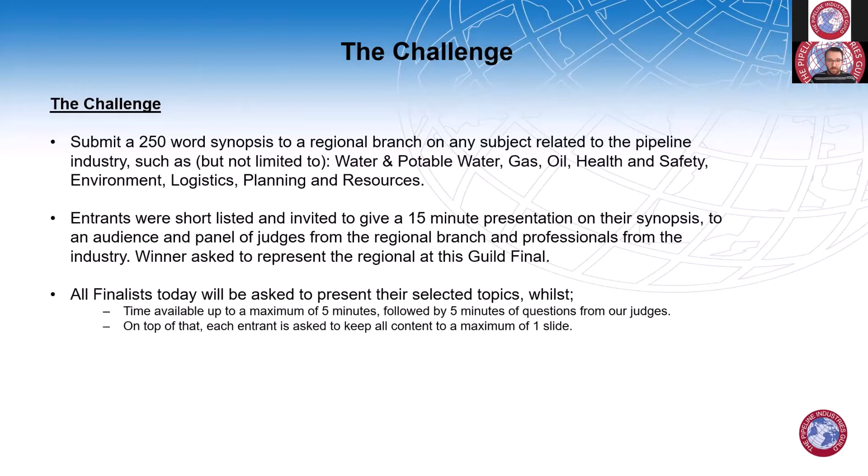Today is a lot more strict. All finalists today will be asked to present their selected topics whilst keeping their presentations to a 5-minute limit, as well as followed by 5 minutes of questions from our judges. On top of that, each entrant is asked to keep all their content to a maximum of 1 slide.

The winner today will receive the £500 prize, as well as being champion of 2021. But also I just want to highlight that every finalist today has also been invited to attend our annual Guild dinner on the 8th of March next year.

Lastly, one of the rules that was on entry is all our entrants today are 35 years of age or younger.

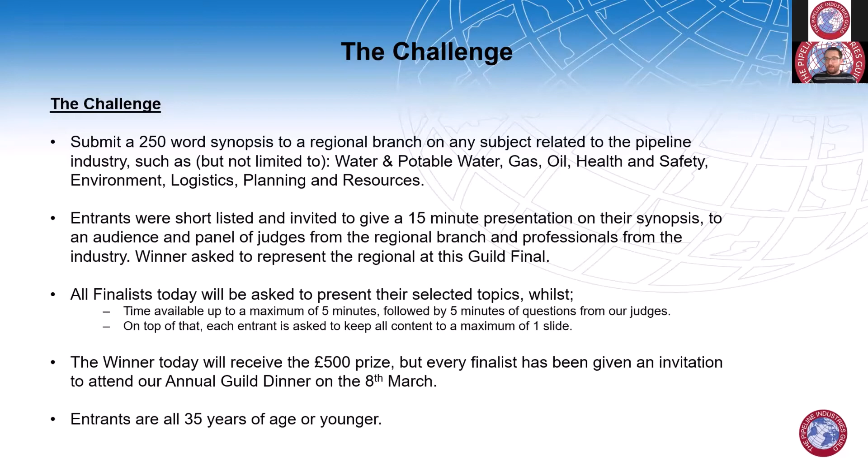So just to introduce our lovely judges today, Kate Lazenby will be one of our judges, our Executive Director of the Pipeline Industries Guild. I'm also pleased to announce John Murphy, our Guild President, will be one of our judges today, who is the CEO of the Murphy Group. And lastly, Dan Jefferson, our Guild Chair and our Engineering Manager at JN Bentley.

We are 3 judges presenting, judging for our 5 finalists.

What they will be looking at today is 2 main focuses of areas around the quality of the content and quality of delivery. They all have received the original synopses of the 5 finalists, but then what we'll also be looking at is the originality of the content, relevance of the material, quality of the presentations today, and their ability to answer the questions. Of course, as mentioned earlier, there will also be a 5-minute timing area as well.

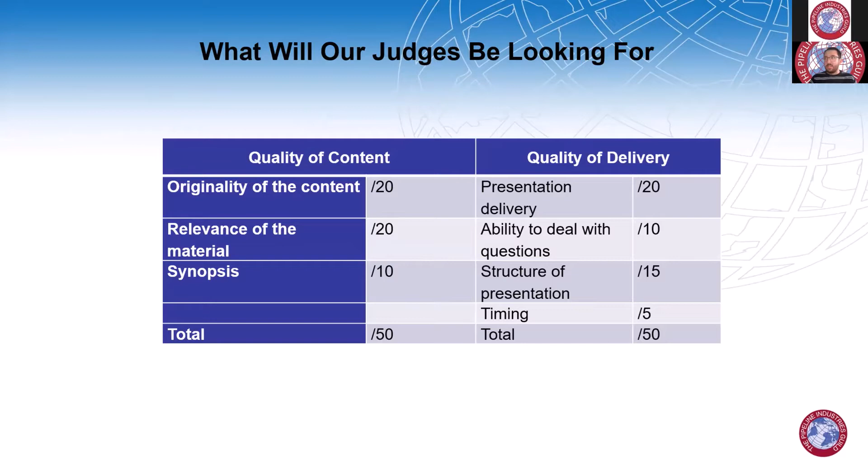So last but not least, introducing our 5 finalists. I'm really pleased to announce that we'll have Serena Variah from Severn Trent, our Midlands regional winner, who will be presenting on the hidden treasures of the water network.

Michael Sinclair from Cadent Gas, our Northern regional winner, who will be presenting on hydrogen-powered construction site trial.

Daniel Mee, also from Cadent Gas, who will be our Scottish regional winner, who will be presenting on reduced depth of cover gas distribution assets.

And lastly, Natalie Lamb, our South East regional winner from QCL, who will be presenting to us on experimental pipe facilities and investigation of chemical-free water.

So they are our 5 finalists, and I can now ask Serena to present on her 5-minute slide if possible. Hello, yeah, I'm just going to start my screen share.

Thank you, Serena. And can you all see that? Yes. Cool. So hello, I'm Serena Variah, and today I'm going to be sharing with you the secrets to the water industry's best hidden treasures.

I joined Severn Trent Water in 2018 as an apprentice project manager. Then in April 2020, I moved into a team which has the objective to inspect, clean, repair, and re-enter into service hundreds of DSRs across the Severn Trent region. What are DSRs, you may ask? They are distribution service reservoirs, and they have the essential job of providing all of your houses with clean drinking water every single day.

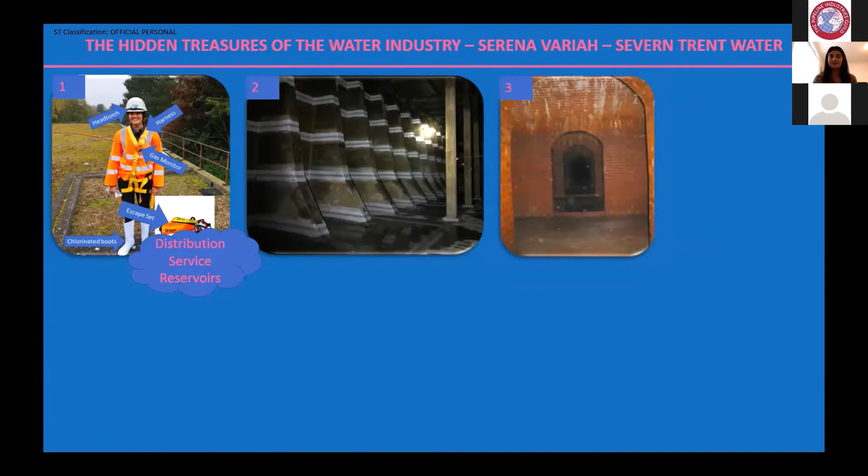Today I'm going to use this presentation to honour Bellevue DSR now that it's out of service, which is a shame, but it has such an interesting and exciting history which isn't widely known at all. So I thought I'd share that with you today, and maybe we can all learn something new.

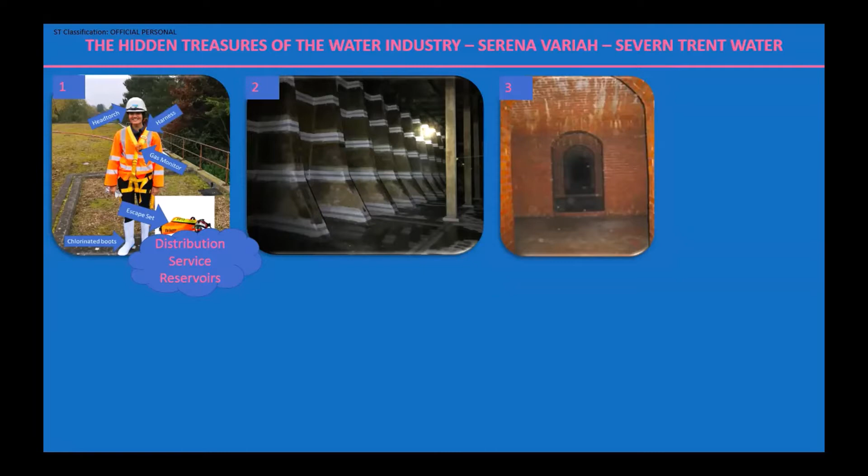I'm going to start by talking about an engineer who was instrumental in building and designing the DSR, Thomas Hawksley. He was born in Nottingham, and in 1830 started working for the Nottingham Water Works Company. He was instrumental in the design of DSRs, and also in making Nottingham the first city in the UK to have a constant pressurised water system, which led to a reduction in diseases that were rampant at the time, like cholera. He was a real innovator for his time.

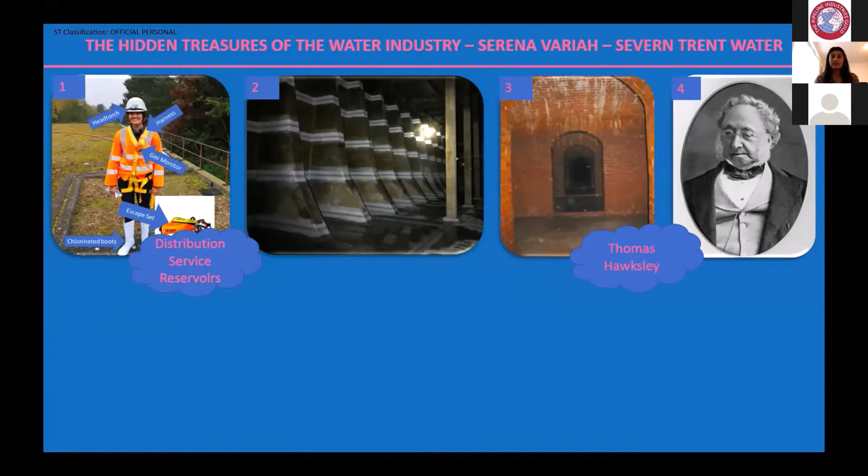Here are some pictures of the beautiful Bellevue DSR. The photos never do it justice, but you can get a little grasp of what it's like inside, with the lovely stone steps and beautiful brick archways and little sections it's all split into. It's crazy to think that was done 170 years ago.

I actually managed to find some articles by the Nottinghamshire Guardian and the Nottingham Review from when Hawksley worked on Bellevue DSR. So I'm going to transport you back in time to 1851, where you can imagine you're there for the construction of Bellevue.

A little snippet from the article: all the important townsmen gathered on the roof of Bellevue DSR, exactly where I took this photo here in number 7. They then entered the lit up tank, which didn't have water in it at this point, and sang the national anthem, Rule Britannia, and had refreshments and drinks. When the first drops of water actually entered the tank, they all rushed to try and be the first to have a taste of it. Afterwards, they went into the city centre of Nottingham to a local inn, where they made a toast to Thomas Hawksley and to Queen and Country.

What an amazing little snippet of history, just from those articles about this tank. I can't help but think about that when I'm doing my day-to-day work, and what an amazing job these engineers have done, for some of these tanks to still be functioning today, which is obviously amazing. They really should be preserved.

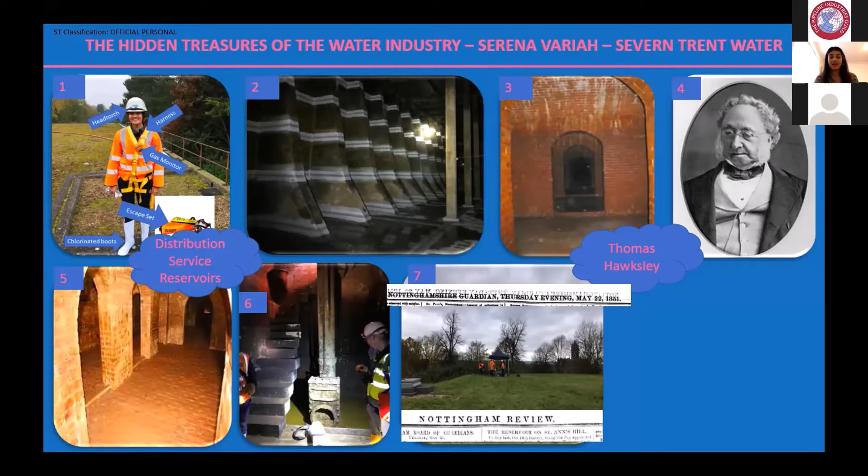And I feel incredibly lucky and honoured to be one of the few people who get to go and inspect these tanks and help manage the repair works of these tanks. And I really wanted to share that with you today, and hopefully they can be preserved for the future. I just wanted to give you a short history lesson, and maybe you can learn something new.

And then maybe in the future we can find ourselves having DSR museums in the same way that we've got pumping stations being preserved. Thank you very much. I hope you've enjoyed it and learned something new, and I look forward to any questions that you may have.

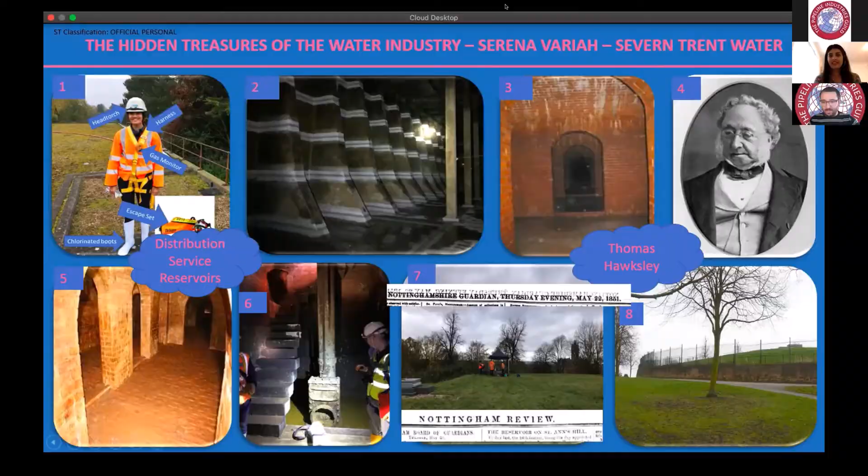That's brilliant. Thank you very much, Serena. That was a really interesting bit, and I'm very impressed you got some articles back to 1851 as well. Yeah, I had to do a little bit of digging, but yeah, there's some interesting stuff.

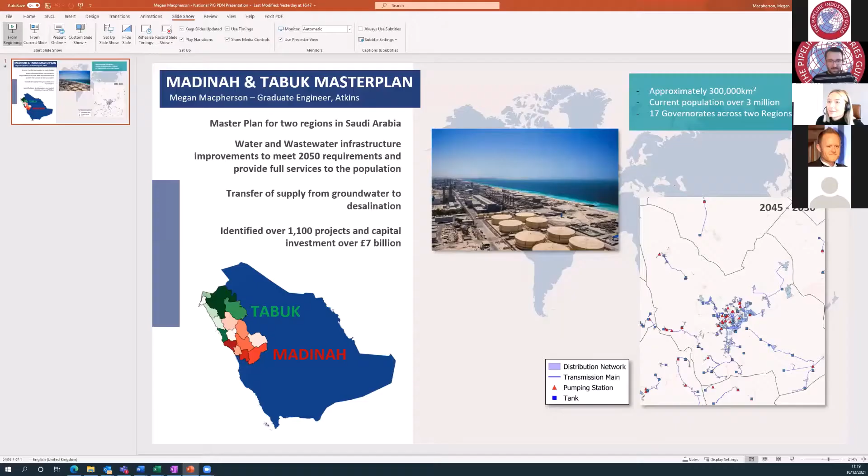Hi, I'm Megan. I'm a graduate civil engineer working at Atkins, and I'm going to give you a quick introduction to a water and wastewater master plan project for Saudi Arabia. I've been working on this project for just over 2 years now.

So just to give a bit of background, Atkins have been tasked with covering northwestern Saudi Arabia, which is made up of 2 separate regions, Madinah and Tabuk. Both regions are split down into various governorates, each with a main city surrounded by various rural settlements. So the aim of this work has been to define the projects needed to improve the quality and coverage of the water and wastewater infrastructure in the area.

We needed to consider the needs of the population up to 2050 and also deliver all of the proposed works in that time frame as well. So rather than try and talk you through the whole process of the master plan in 5 minutes, I've just picked out a few features of the project that I've found particularly interesting or challenging.

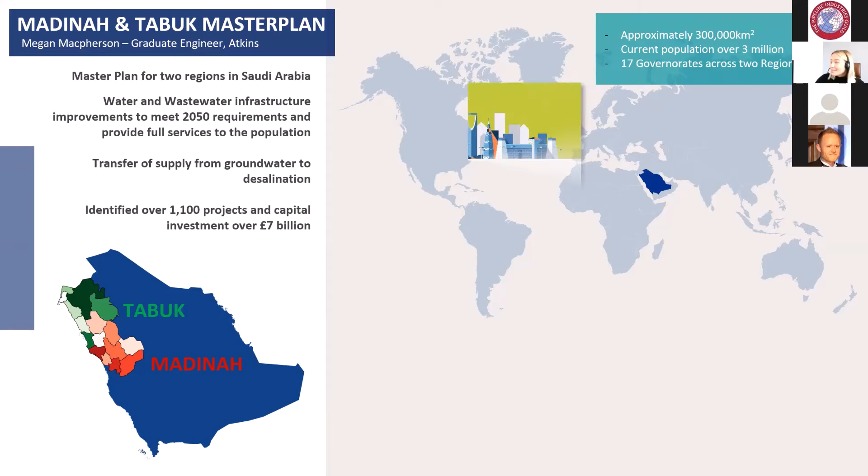So the first is Saudi's Vision 2030. This is a strategic framework aiming to improve public sector services across Saudi Arabia, and it presents quite specific milestones for water and wastewater services. One of these is to make sure that by 2030, 100% of people in urban areas and 95% of people in rural areas are connected to networks.

So just to give an idea of the situation at the moment, approximately 20% of people are not connected to a water network and 40% of people are not connected to a wastewater network. So the target to increase the coverage so significantly by 2030 essentially condenses that planning period, because a lot of projects need to be delivered by 2030 rather than by 2050.

So one of my first tasks on the project was actually linked to this target, because I needed to geographically locate the population that were not yet connected to a network. It was a task made particularly difficult by a lack of data, but we needed to quantify how much of the population were unserved and locate those areas most in need.

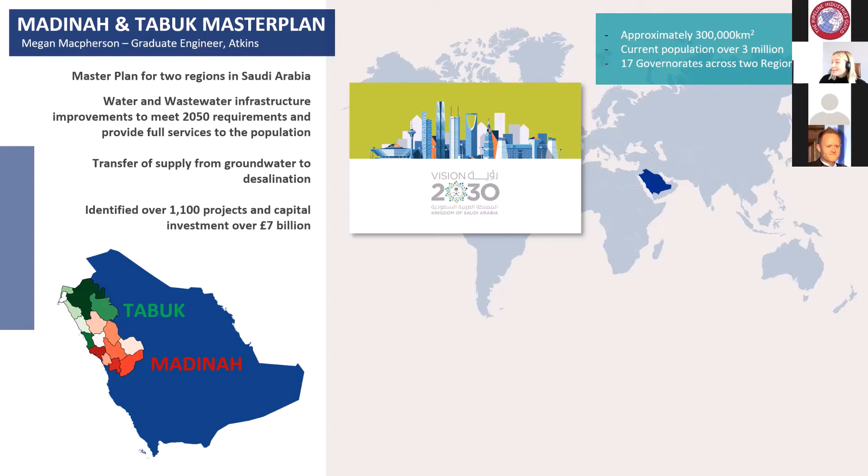So the next challenge I've looked at is the Pilgrim Influx. The largest city in Madinah is home to 2 religious festivals and draws a huge influx of pilgrims every year. The Pilgrim Influx actually doubles the population of the city in those periods, which presented quite an unusual challenge in sizing the networks, because there'll be really high demands for short periods of time, and sizing the networks based on those flows would actually just create redundancy throughout the rest of the year.

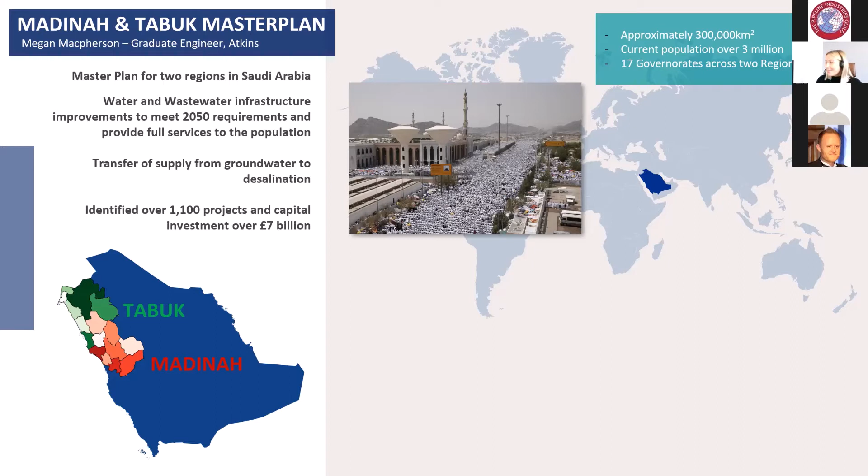So the solution has been to propose large strategic storage tanks at the outskirts of the cities to deal with the demands in those periods. Now we'll move on to how they're going to meet those demands.

Madinah and Tabuk are currently highly dependent on groundwater, and that is a source that's becoming increasingly unsustainable. Given that surface water is not really a viable option out in Saudi, the plan is to make the move to desal as quickly as possible.

At the moment, there are already some desalination plants providing a portion of the region's demand, but those are actually due to be decommissioned by 2050.

So the national water company in Saudi does already have plans to introduce new desalination plants along the coast. It was my job to look at the supply-demand balance in each area and determine whether those proposed desalination plants would actually satisfy the demand in the areas they were supposed to be serving, and whether they would continue to do that as the population grew.

After considering all of these various targets and requirements, we came up with a suite of projects to cover them all. We've actually proposed over 1,100 projects in total, with a capital investment of over £7 billion. All of these projects vary in size, but they include all the typical elements of water and wastewater infrastructure.

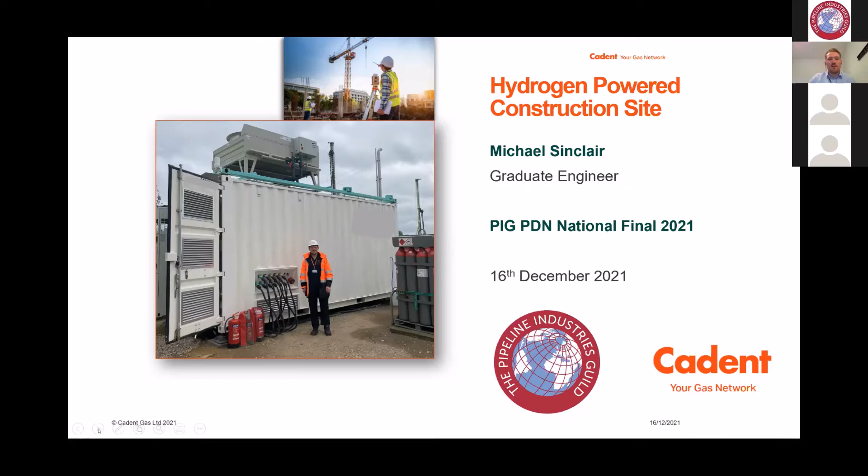Construction is not going anywhere, and it attributes roughly 10% of our CO2 emissions as a country, as the UK - directly 10% of our CO2 emissions are associated with construction activities. And there's so much going on with construction - you've got materials, you've got heavy machinery, and as we're overpopulating, we're building more homes, more buildings, we've got projects like HS2. So it's a massive barrier that needs to be overcome to meet our wider net zero goals by 2050, and obviously it's more prevalent than ever now after the outpouring from COP26.

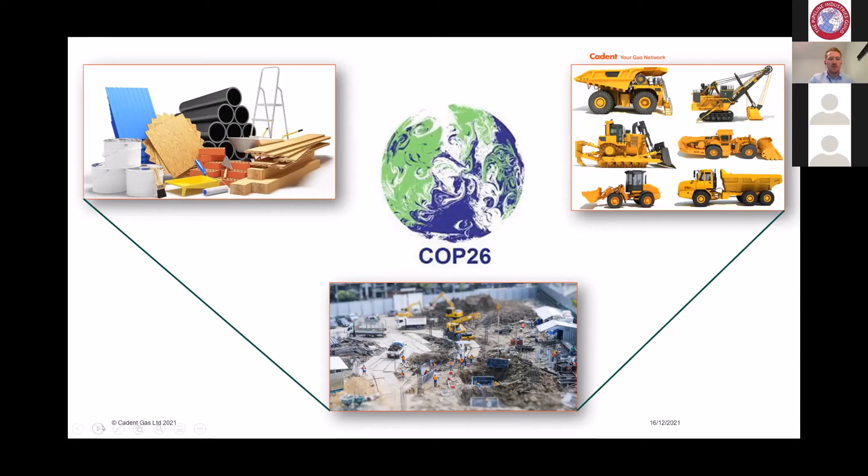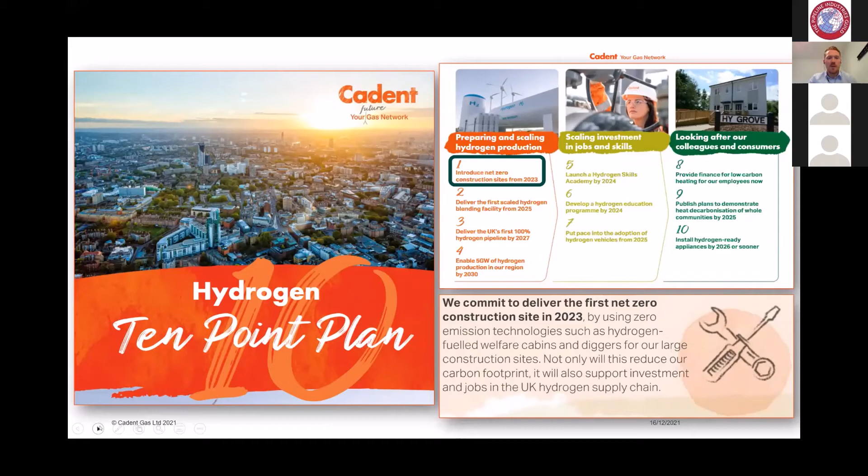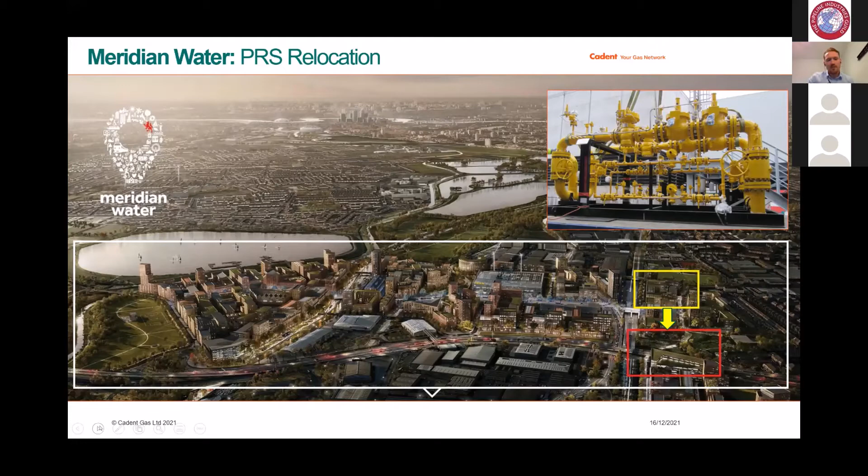But what's the immediate opportunity that we saw? So whilst it's difficult to decarbonise the likes of your materials and your heavy machinery, there is an immediate opportunity to decarbonise the power that you supply to your off-grid sites. And when I say off-grid, I mean it's not feasible to install a temporary connection to the electricity grid. You have to find some way of providing your own power source on site, independent of any grid.

And that's traditionally done through diesel generators. You'll be familiar with these on fun fairs, or if you've visited any construction sites yourself. They're noisy things, they're chugging away, and they're terrible for the environment. But these provide power for all the electrical appliances on site, the likes of kettles, electric heaters, microwaves, hot water sinks - anything that's plugged in and requires power on site, it needs to come from somewhere.

And the options we've considered to decarbonize this - we know we can do better and we should be doing better. Obviously, the baseline is your diesel generators I've highlighted. They're cheap, they're familiar, they're easy, but they are terrible for the environment and we should do better.

A midterm solution you could point yourself towards is HVO, which is hydro-treated vegetable oil, essentially biodiesel. So it's the same product at the end, but it's come from a more renewable source, in the way that crops have degraded over time and absorbed carbon dioxide as they've grown. So the net carbon dioxide emissions are lower, but you still have those emissions at the tailpipe as such, and they're still noisy.

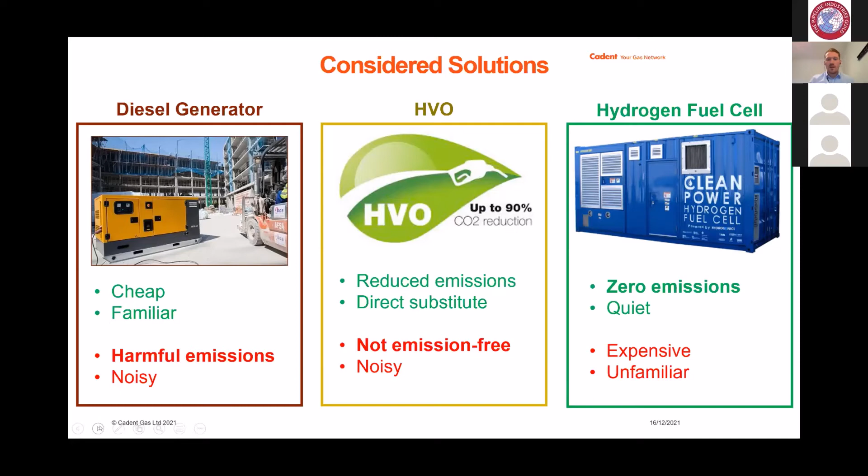But this is the solution we opted to go with on the site. So I was project manager, tasked with leading a team of 6 graduates to try and decarbonize our welfare facilities on site. And I'm very proud to say that after 8 months of planning, we did land a hydrogen fuel cell on our targeted site in London, which powered the site for 20 weeks.

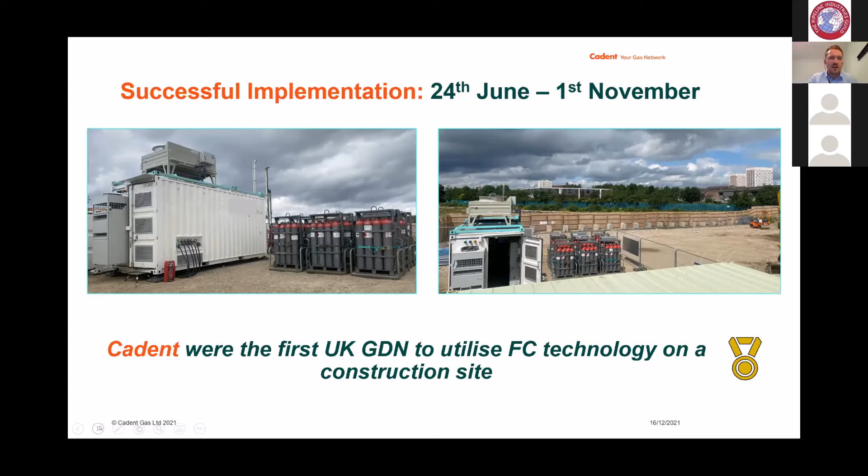And we were the first UK-based gas distribution network to implement fuel cell technology in this way. So after 8 months of planning, it was a really proud moment for me to see that land on site for the first time, not just for Cadent, but any UK GDN.

And some results we got from that - over that 20 weeks alone, we supplied a base load of 35 kilowatts, and we saved around 22 tons of carbon dioxide being produced over those 20 weeks. And that's the equivalent uptake of just over 1,000 trees, to give you some perspective.

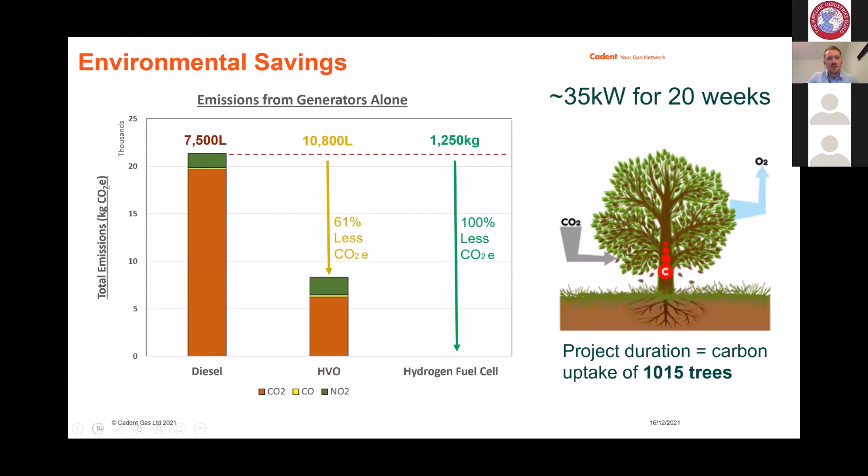So the recommendation we got from this, and the one I've given to the business, first of all - I don't think we should have been on diesel in the first place. It shouldn't be the mission to get off diesel. It should be biodiesel from the start. And then how can we do even better? You're essentially putting a different liquid into the same machine and helping the environment.

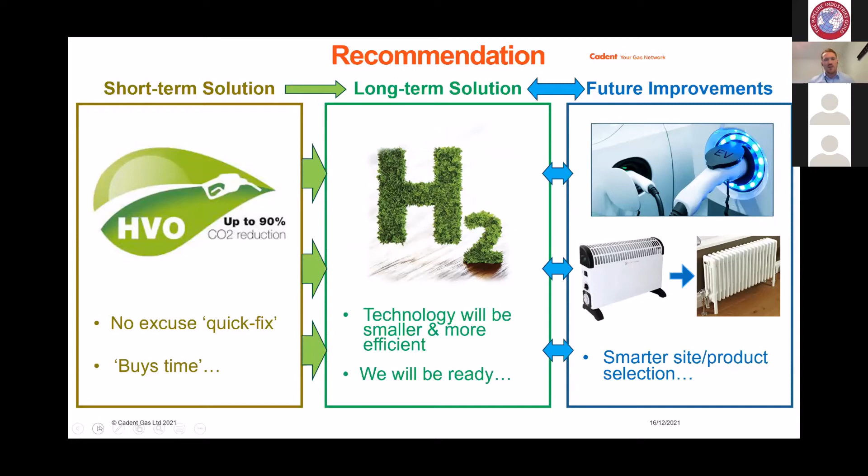But the long-term solution should be green hydrogen, as we've seen. The technology does work, it does reduce emissions, but the catch right now is it is very expensive. But we can help reduce this in the future by implementing more sustainable means, and perhaps pairing it with technology such as solar cells to really get the best out of it.

I was project manager, as I said, so I was pulling together all the different stakeholders, including our supplier, reporting to above at Cadent, and then including all of our internal teams, our safety teams, our engineering teams, to ensure that we were okay from all sides and everyone was happy with it on site.

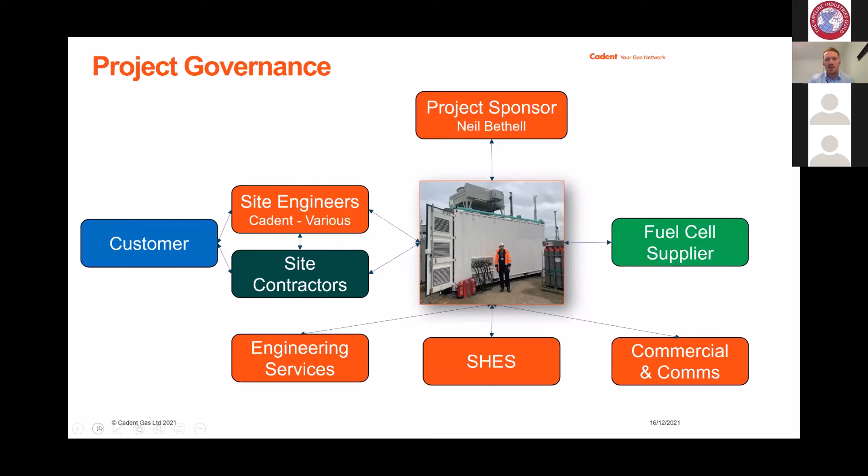I learned a lot from this - managing teams, managing stakeholders, and ensuring that everyone was happy with the project and making sure that we met all deliverables, obviously the main one being landing that fuel cell on site and saving a lot of carbon dioxide emissions.

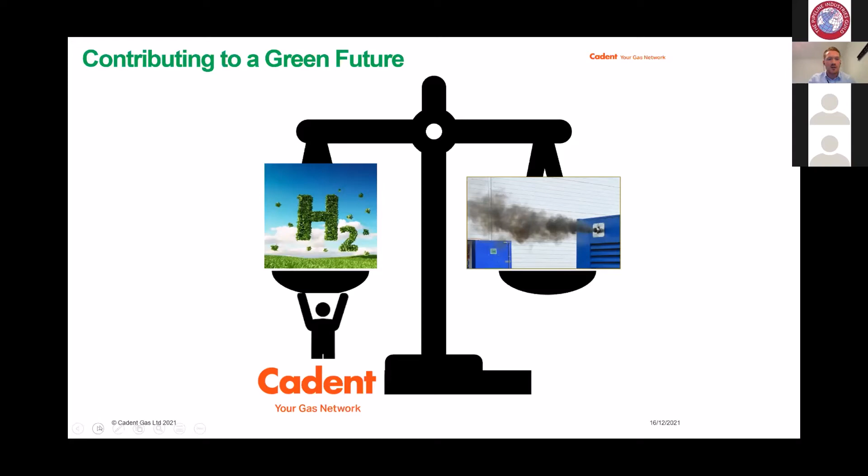I'm really proud that at Cadent we're not just waiting for this technology to be ready on the shelf and hydrogen to just land on our lap. We're actually going out of our way to be bold and conduct some really interesting trials and put our neck on the line to help accelerate the growth of this green technology. So thanks very much for listening, and I'll hopefully take any questions now.

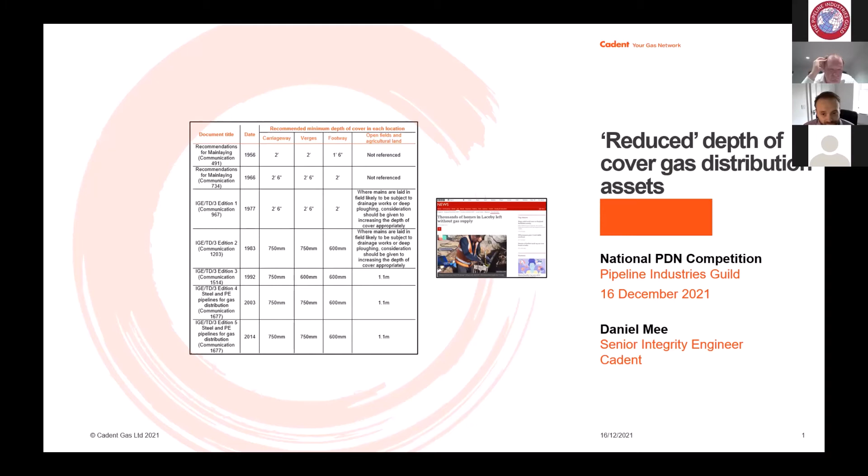So utilising the Ordnance Survey data in our Esri mapping software and our pipe data, using the descriptive term of agricultural land, we can undertake geospatial queries to identify where we have pipes running across agricultural land, and using our asset data, identify where those are laid pre-1977.

To establish the level of individual risk posed by these assets, we've undertaken a quantified risk assessment from first principles in order to understand individual risk based on this data extract, with an application of probability based on research and data we've obtained reactively through our existing management processes.

So if we take the hazardous event as the ignition of escaping gas caused by the striking of a shallow pipeline that causes the pipe to fail, we can look to determine the individual risk, which is calculated based on the frequency of incident per year, multiplied by the probability of casualty and probability of exposure.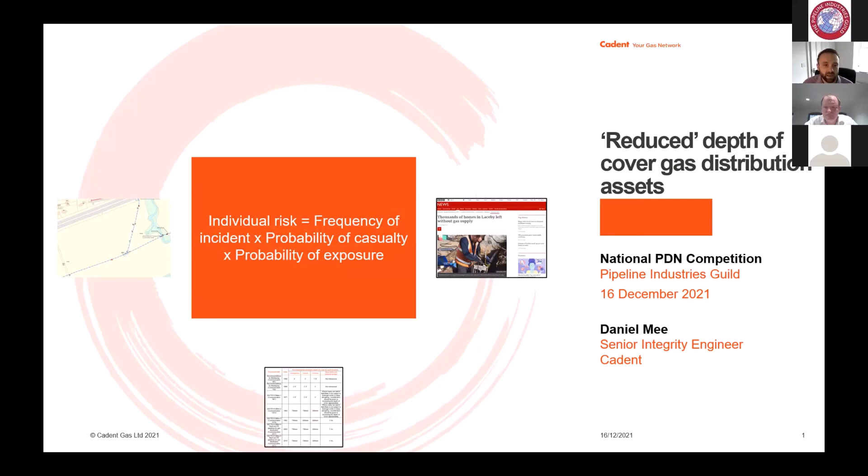Determining the factors that influence the two probabilities along with the frequency of incident, we're able to calculate a numerical outcome of 1.48 times 10 to the minus 5, which sits in the tolerable, if as low as reasonably practicable, ALARP region. It's worth noting that with conservatism built into this QRA, it places the outcome into this classification.

Therefore we, as Cadent, as an operator of these pipelines, need to ensure we apply relevant good practice, which we do through our reactive management, and consider the implementation of further risk reduction measures. However, following an ALARP and cost benefit assessment I've undertaken, implementation of further risk reduction measures in the form of a proactive identification approach, based on the population of pipes we've got at this pressure in these locations, is grossly disproportionate relative to the risk it reduces and the benefit gained relative to the historic incidents.

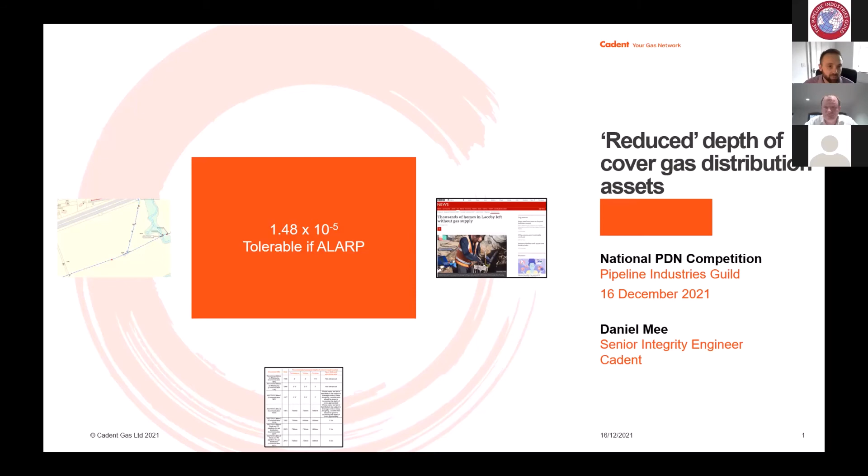So to summarise, one of the large factors that contributes to reduced depth of cover is historic pipe construction standards. Whilst it's not appropriate at this time to blanket survey all of these, in respect of our net zero proposals and our desire to reconfigure, replace and repurpose parts of the network to transport hydrogen, this work has driven targeted surveys of these pipelines before considering them for repurposing, and also working with our design engineers to see if we can reconfigure the network to remove these risks from our gas supply arrangements.

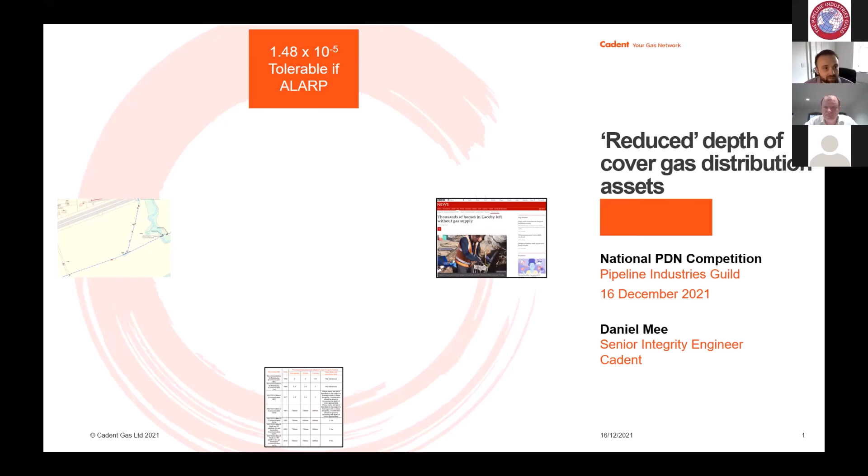Thank you for listening, and I'd like to open up to questions.

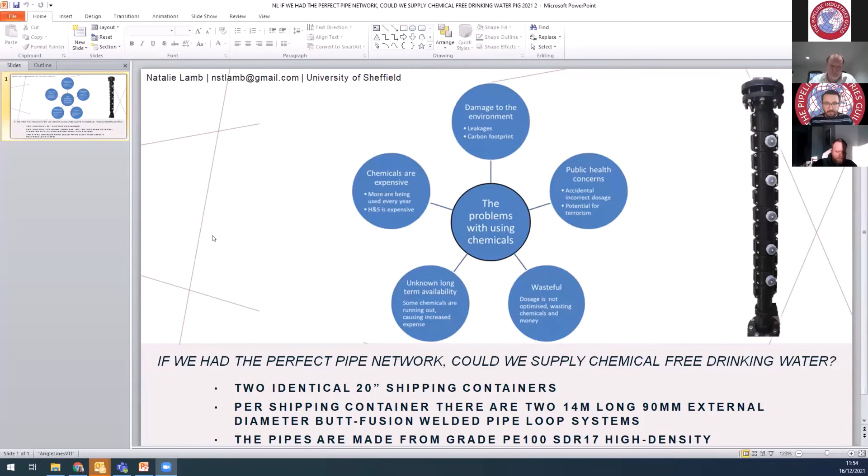Thanks so much. Can you hear me and see my screen okay? Yes, I can. Perfect. So you're very fortunate today, you get to hear me and my husky voice. So that's good news for you guys.

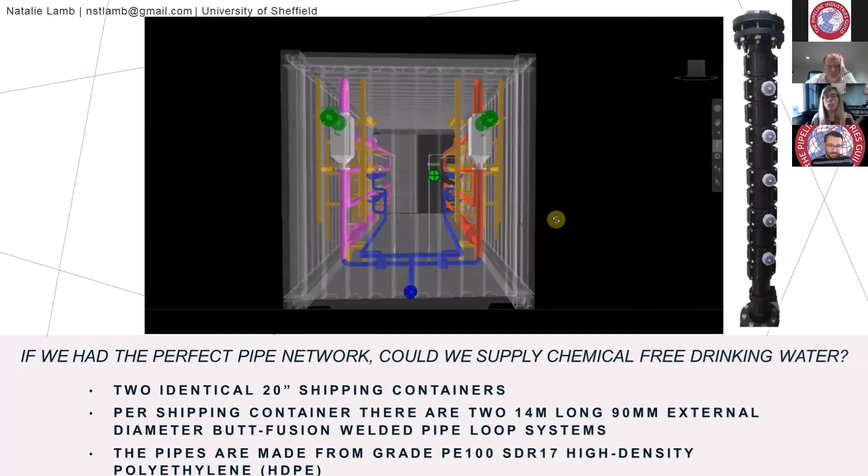So in the UK today, we use a lot of chemicals to treat our drinking water. Tap water is absolutely fine to drink, just giving you a heads up before, I drink tap water, so it's absolutely fine. We use a lot of chemicals to treat our drinking water because of the pipe network. Can anyone guess in the chat how long our pipe network is? Are we talking days, weeks, months, years to get from the water treatment works to your kitchen tap?

Jason joked in the chat, it's really nice to see that assets are older than him, but you're the spring chicken compared to the pipe network that we have in the UK. There's actually enough pipes in the ground to go from the earth to the moon and back.

Because these pipes are old, sometimes Victorian era, because there's so many of them, because they leak, it means that we have to dose chemicals to protect that water on this journey from the water treatment works to the tap. This presentation today is all about my PhD research with the University of Sheffield and these chemicals that we use to treat drinking water.

So the system works. Why was I trying to shake it up a bit? Basically, the chemicals that we use have all sorts of problems, all sorts of unintended side effects, and sometimes unknown long-term availability. Chlorine, for instance, has been found to increase your risk of bladder cancers by 1 or 2% over the course of your lifetime. That's really, really low compared to other things like living in an area where they drive cars, or eating red meat, but it's a risk nonetheless.

Phosphate is dosed to protect against lead pipes, which around 25% of houses in the UK, built before the 1960s, have within them, and lead is toxic. Phosphate forms a protective layer around the inside of these pipes. But some sources say phosphate is going to be gone in the next 50 years—it's going to run out because it's a mined rock reserve.

So my research was all about looking at whether it would be possible to have the same really good quality water, but without having any of those chemicals on this journey through the pipe network. On average in the UK, it's about 3 days for water to travel from the water treatment works to the tap, but in some cases it can be as many as 5 or 7 days. That's why these chemicals are really important at the moment.

So what I was investigating is, if we had the perfect pipe network, could we get rid of these chemicals? To do this, I designed and manufactured a series of fake pipes in shipping containers. You walk inside the shipping container, there's a wall of pipe on the left and a wall of pipe on the right. They're identical in every way, but one was fed water from before chemicals were dosed at the treatment works, and the other was fed after dosing, so I could directly compare the two.

I also had removable pipe sections in the wall that I could take out to look at what was growing on the wall itself, as well as just the water running through it. And what I actually found was that not having these chemicals didn't really impact the water quality all that much.

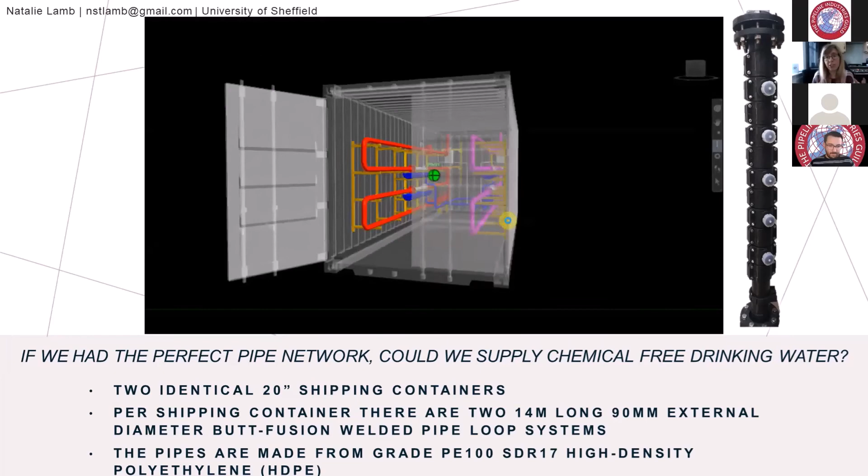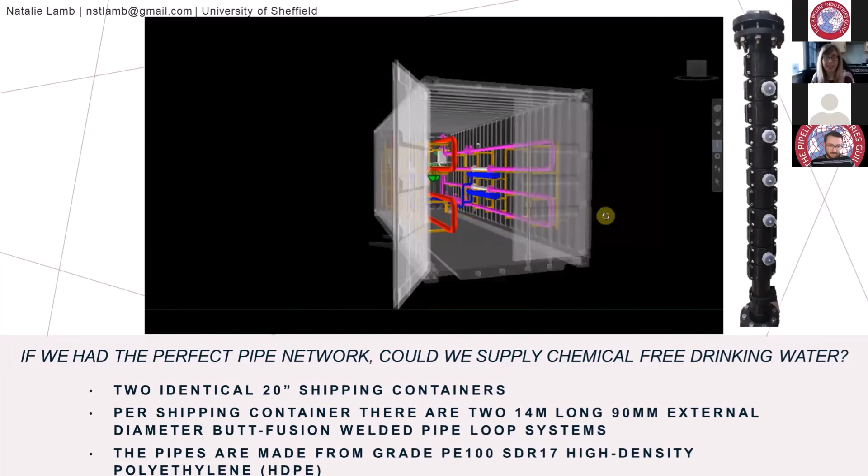The reason I was looking into this is because there are other countries out there, like the Netherlands, who have been doing this for many, many years. But the thing is, all of their water is groundwater in source, so it's already very good quality to begin with. This is why I was doing these experiments—to see if they can do it in these other countries, can we do it here? It's a bit like the opposite of Megan's work, where she was taking our learnings to other countries. I was trying to take the learnings from other countries and bring them to the UK.

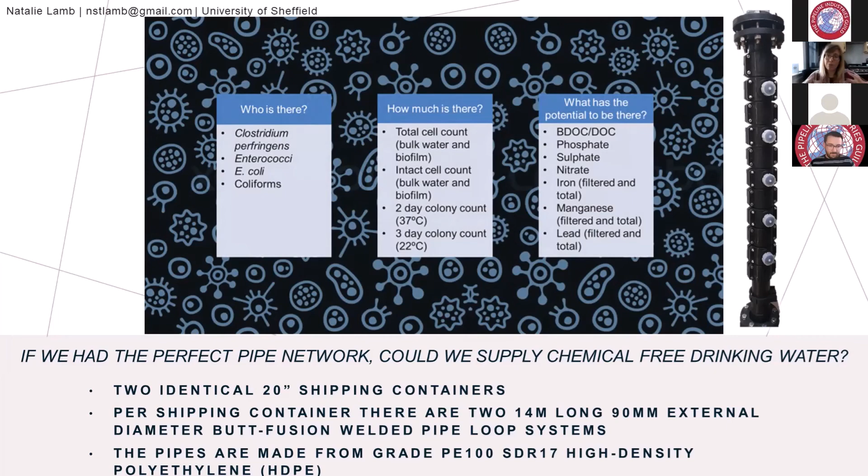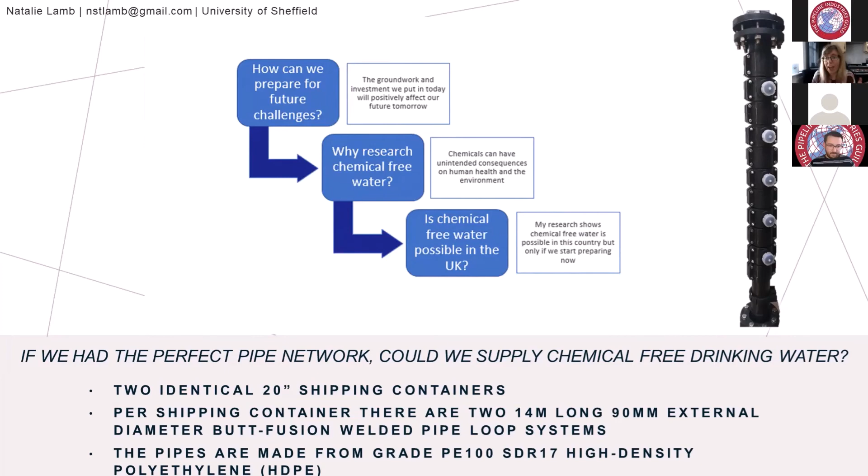So overall, is chemical-free water a possibility in the UK? Yes, my research shows it is. The next steps would be going into a place, maybe a new build area with a groundwater resource, and actually giving it a go, maybe turning off some of these chemicals—if I can find a water company brave enough to partner with us in this research.

Yes, Natalie, thanks very much for your presentation. Can you just give us an idea of some of the challenges you've faced during your thesis? Yeah, so I think for me the biggest challenge has been project management and stakeholder engagement.

Going into this, I was kind of expecting to be a student, but actually I found out that I was more of a project manager, and I think I was actually kind of a micromanager, because rather than trusting one company to build these pipe rigs, what I instead did was design it myself.

I wanted this company to produce this individual little plastic piece, and I was going to go to this source and ask them for this piece or this metal clamp, and do it all myself. I think it would have been so much easier, better, and cheaper if I'd outsourced everything to one contractor, because it was an awful lot of work. If I was redoing this, I'd also get someone to help with the design, because I'm a microbiologist by background, so I had a clear image of what I wanted it to look like from a microbiology perspective, but not such a clear idea of what I wanted the pipes to look like. And the pipes themselves are very important when you're building a pipe rig.